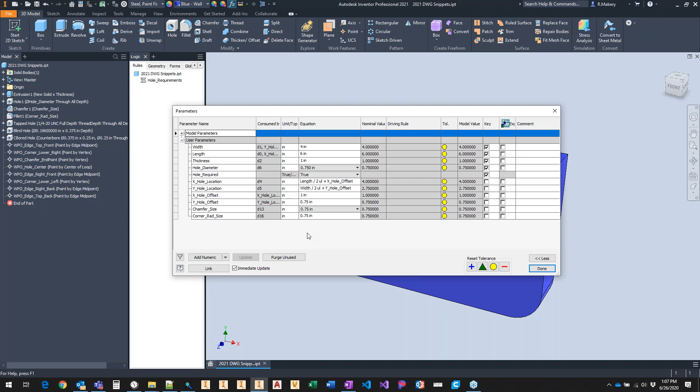Okay, and there's also one single rule in this that is controlling the suppression state of hole one based upon that Boolean parameter called hole required. Okay. And then we also have a simple form that I can control some of these variables. Okay, nothing too exciting going on there.

We also have applied a lot of name geometry to this. Name geometry was released back in 2019, I believe, and it was used a lot prior to 2021 for constraining parts together. It's a way of getting a face, some entity out of my model in order to do something with it.

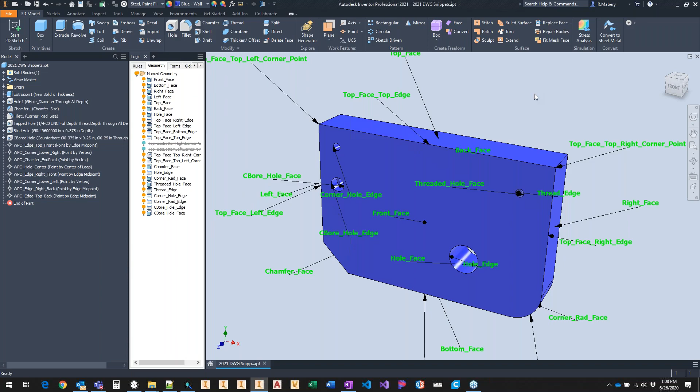If I go to my geometry tab here on my iLogic browser, I'll see that I've got a whole lot of things named, and I'm going to temporarily turn the visibility of those on. Don't get scared by looking at this. I've named everything in here, okay? As I hover over these, we can see the top face. I've got corner points. I've got hole faces. I've got front faces. Anything that I want to be able to, in this case, annotate, has name geometry applied to it.

Now, as we get into actually doing the capture current state, we'll see that I don't need to have named this. But again, I like standardized naming schemes, and this allows me to name it what I want to name it. Okay, so I'm going to turn that off.

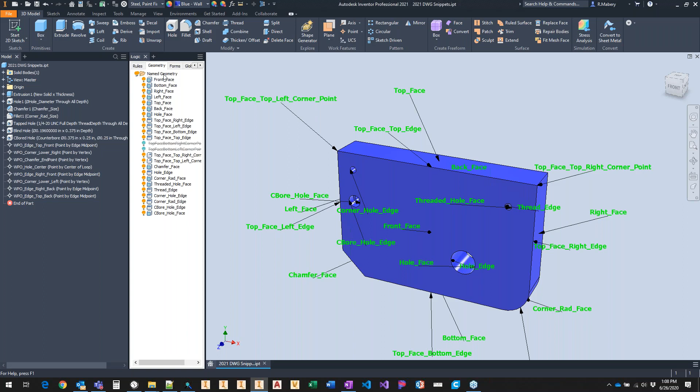And if you're not familiar with name geometry, it's simply a matter of picking an entity on my part, right-click it, and then I can assign a name. This particular face already has one, so my options there are to show that, edit it, or delete that.

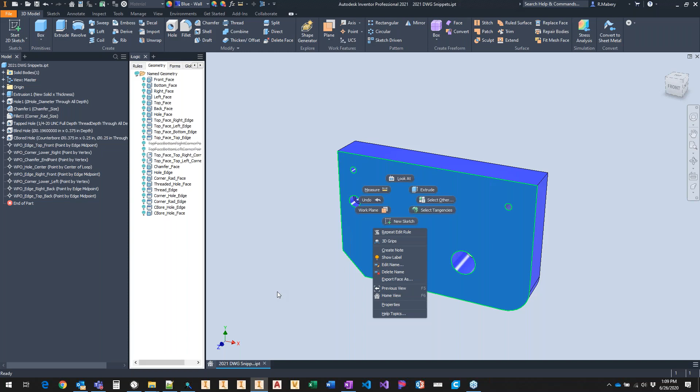Okay, so now we've taken a quick look at the model. I'm going to make a quick drawing here of that part. Okay, just a very simple drawing with two views. I do want to rename my views. Again, anything I'm trying to manipulate with iLogic or any method, I want to rename it. I want to know that it's the right view. I don't want to have to guess that it's view 2 or view 3 or view 4. This helps me understand, again, in my code, what I'm doing.

So I'm going to add a quick rule here. I'm not even going to bother naming this because I'm only doing this temporarily. And I'm going to place in the new add linear dimension snippet. And that is in my new drawing category here. So I'm going to come down to linear dimension. I'll double click that guy. It gets entered into my rules editor. I've upped the font size here rather large just so that we can see everything.

Okay, and let's talk a little bit about what this snippet is doing. It's declaring a bunch of objects and then assigning those objects based upon things in my model, right? I'm declaring sheet 1 in this first line as the sheet that's named Sheet:1, right? That's the default name for a sheet. Same thing with my view here. That is getting the item by name, named view 1 in this case, that's part of this drawing views collection that's on sheet 1. Okay. I need to know what view I'm working with when I'm going to annotate things or when I'm going to get intent from things.

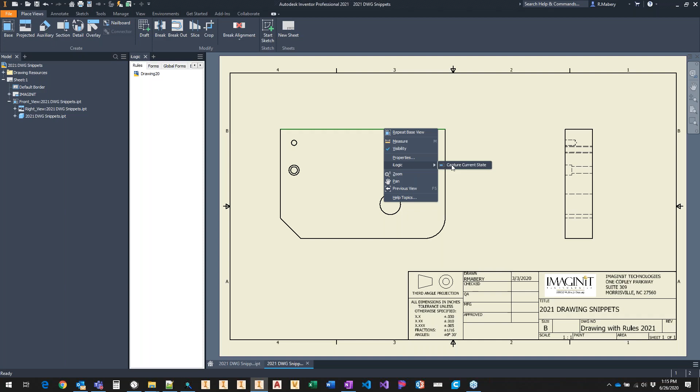Back out in my drawing, one of the other new things in 2021 is the capture current state. I can select or highlight over any curve in a drawing view, right click, and then I have this iLogic flyout, and then a capture current state flyout there. Now, if I have modified this part already, I simply get the code clipboard dialog box that pops up.

If this is a brand new part that I haven't modified from this drawing, I'm going to get a dialog box that says, in order for me to assign a name to this edge, I have to be able to modify that part. So take a look at what it's giving me here. It's giving me, in essence, those same top 3 lines that we saw previously. It's declaring sheet 1. It's declaring the front view, right? We're not getting view 1 because I've renamed my view already. So it knows that it's looking for front underbar view.

And then that geometry already has a name assigned to it, or an attribute assigned to it, a tag about it. It's called top face. So again, it's declaring top face as the front view and the intent of that, or that curve that's being generated there. Okay. Everything that shows up here in the code clipboard, as it says toward the top here, gets copied to my clipboard for the rules editor. Unfortunately, it doesn't get copied to a clipboard that I can use elsewhere as well. I can only paste into the rules editor.

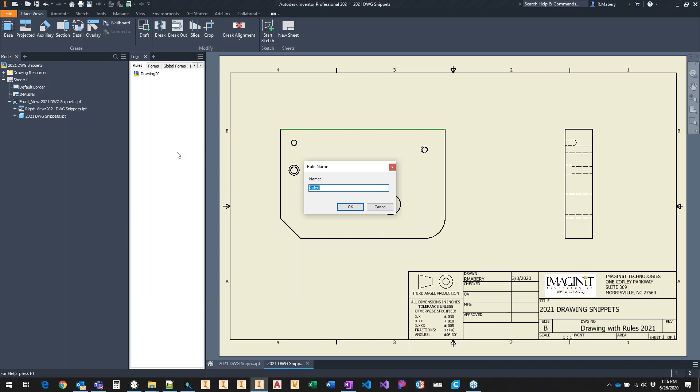So I'm going to just go ahead and hit OK here. And then I'm going to right click and create a rule called overall dims. And then I'm going to paste that bit of code that it generated for me. Okay. Now I'm going to again put in my linear dimension snippet. Go to my drawing category, double click linear dimension, and we get a lot of duplication up here at the top, right? Those top 3 lines I don't really need because I got that from my capture current state. So I don't need these guys at all. I'm gonna go ahead and delete those.

So I still need that gen dims. I still need the access to the general dimensions from sheet 1. And then my lindim 1 there, I'm going to rename to overall length. That name is used when we start managing entities, and I'll discuss that when we talk about some best practices. The next entity is the origin point. Again, that's the Point2D or the X comma Y values of where this dimension should land.

As we look at the way the default snippet uses it, it's got an X and a Y coordinate here, but they're related to my view 1 or whatever view I happen to be working with, and they're in percentages. So this is the X value there. The X value of my dimension text origin is going to be 50% of my view width. And the Y value in this case is going to be 10% of my view height below the view.

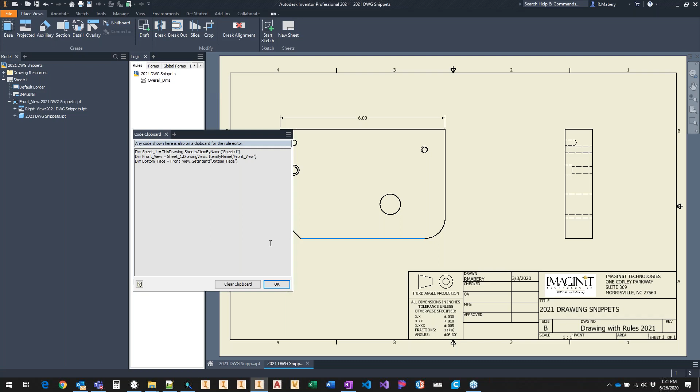What if I didn't want to dimension between 2 faces? Okay, that's where that second optional intent can come in. So let's get some more data out of our drawing view. I'm going to right click here. Again, go to my iLogic flyout, and I want to do the capture current state again, right? It gives me that same information about those sheets, the front view, and then also gives me the bottom face in this case. Okay, I'm gonna go ahead and hit OK.

I'll go back in and edit my rule. I want my declarations where I'm getting that information about the object up here at the top. So I'm going to place my cursor up there and paste, and notice the only thing I'm getting there is that bottom face. I'm not getting the repeats of the sheet 1 in the front view. Okay, so I need to create another dimension here. I'm simply going to copy and paste that LinDim 1. Right, copy and paste is your friend. I need to change this guy to 2, and then we'll change to overall width.

And I'm going to use again the front view, but my sheet point needs to be modified, right? I basically need to flip these because I want to go to the right, and then I want the Y value to be in the middle of that. If I leave it as it is, it's just going to try to dimension that top face. We need that secondary intent, right? Remember that optional intent 2 as a secondary geometry intent. So I'm going to copy my bottom face to my clipboard, and I'm simply going to come here and put in a comma and paste that bottom face. So I see there in bold now, I'm including that optional intent 2 as my geometry intent.

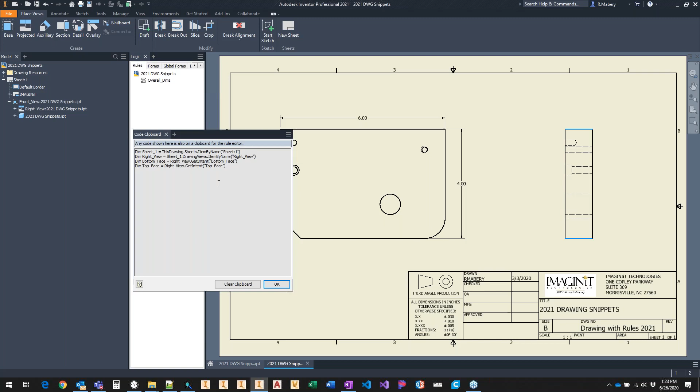Also, nothing wrong with it if you know what those values are, right? If you've gone through already and added that name geometry, I could come in here and replicate lines like this all day long, just modifying what the object name is going to be, and then modifying that string argument, what intent or what geometry you're trying to find outside in your model.

Okay. So that's the basis of a linear dimension. I need to declare some stuff: the sheet, the view, whatever entities you're trying to dimension. In this case, I'm dimensioning both the top face and the bottom face. I get access to my general dimensions collection here.

And then I'm using the AddLinear for the various dimensions, right? What's my dimension string? What's the name? What's the text? And then what's the intent that you're trying to dimension? So let's talk a little bit about some best practices before we move on and look at some of the other stuff. One has to do with this text origin.

This is an easy way of placing where things show. It's not giving me the most control, right? 10% of that view, what does that mean, right? I should be spacing my dimensions a 1/2 inch off the object, and then secondary dimensions should be placed 3/8 off of that first dimension, right? If I'm doing that where it's percentage of views like this, I don't want to have to go do the math to try to figure out what that is.

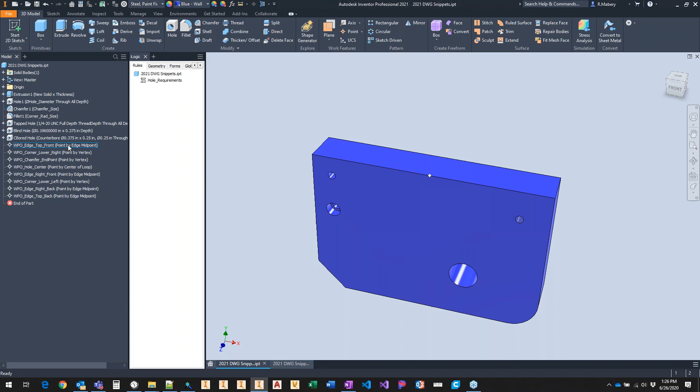I'm going to use that and get its sheet point and then space my dimensions away from that. I know where that point is in space, or I can figure out where that point is in space and then offset it to values that I want it to be. Okay, so I'm going to go back to my drawing here, go back to my overall dimensions, and I'm going to include a secondary line of code here. Oop, I copied too much. So I'm going to copy just that bottom line, paste it in there, and then I'm going to call him WPO edge top front.

And then I'm going to get that entity. I hope that's what I called it. Right, I'm getting the intent of that point. Let me go ahead and run that to make sure that's what I actually called it. And it is. I would have got an error there if it couldn't have found this entity inside of that drawing view. Okay, then I'm going to do some calculations here for where that point needs to be.

So I'm going to dim top length position as this drawing dot geometry dot Point2D. Again, that Point2D you can think of as an XY point somewhere on my drawing in this case. I'm defining that at this point at 0, 0. I don't really care where it's going. And then I can set it to the value of what that work point is according to my sheet.

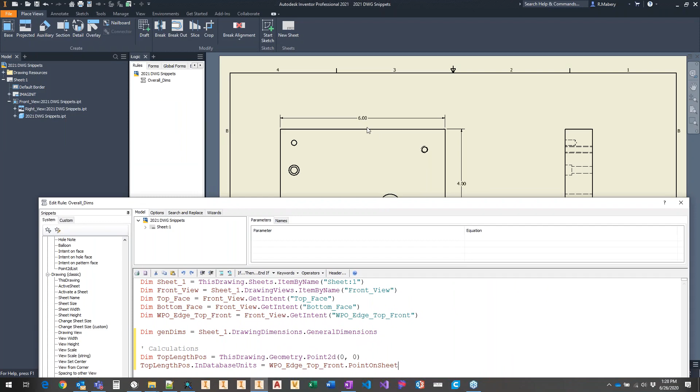So again, I'm going to copy and paste just to make it easier there. And I'm going to do the point on sheet property of that point. Let me move this out of the way real quick. That's going to translate that point to an XY value on my sheet. And then that's going to be stored in the database units for the position top length POS. And then I don't need to modify the X because our point was along the midpoint there. I really only need to modify the Y.

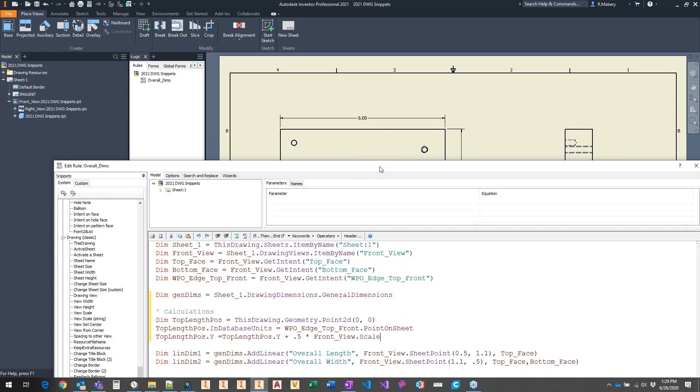So again, I'm going to say the dot Y of my top length position equals the Y plus whatever value I want that to move up. I talked earlier about that being a ½ inch off that. And then I'm going to modify that by the front view scale. It might look complicated, but again, we're very simply getting that point in space relative to my drawing, and then I'm going to move 0.5 inches up. I don't have to worry again about modifying the X value.

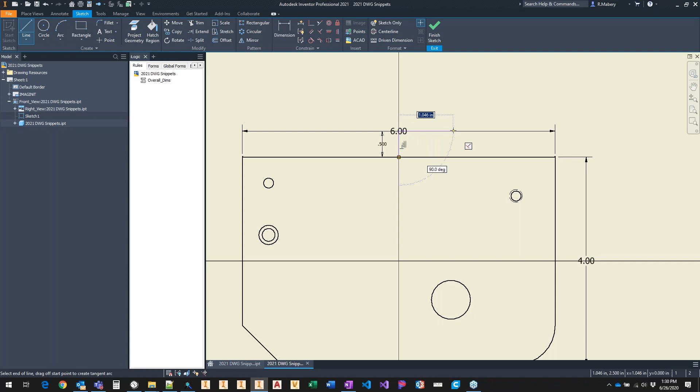So now I don't need this long string here. I can replace that with my top length position. Remember our AddLinear there, it's looking for a Point2D in essence. And that's what I'm supplying it here with this top length position entity. You saw that thing shifted up ever so slightly. If I go make a sketch on this drawing and create a line from that midpoint up a ½ inch, there we are, right on that extension line. I know exactly where that dimension is going to end up, right where I want it to be.

Again, that comes in very handy when I'm trying to add multiple dimensions, right? When we get into dimensioning that hole, I'm going to want to be able to move things around. I can do the same thing here for that right dimension, and to make things a little easier so we're not watching Randy type the entire time, I do have this text already written out. So all I'm doing here is I'm getting another point, right? That work point edge right front.

And then I'm doing the top width position the same way we did the other one. Okay. I'm creating a Point2d. I'm getting that right front point on the sheet. And then I'm modifying the X in this case, right? I want it to move over to the right a ½ inch.

Then I would modify all of that there. Okay. Replacing that long front view with just my top width position. Hit save and run, we see that dimension move ever so slightly there.

Okay. Something else I should be doing here is using my manage entities. Works very similar to the manage objects that was introduced, I think, again in 2019, when I start adding components with the iLogic manage components. It's going to handle deletion of things that aren't required.

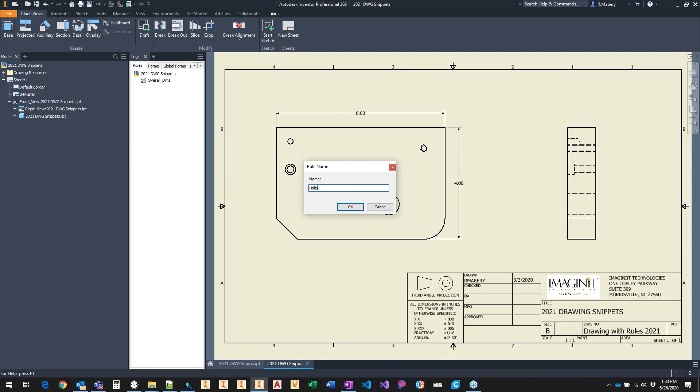And again, I'm going to cheat a little bit so we don't watch Randy type. And I'm going to paste some code in here. Okay. Size this a little bit more so we can talk about what's going on. The stuff here at the top should be familiar at this point, right? We're declaring that sheet. We're getting the general dimension collection, and then I'm declaring that front view.

Now, if you're going to put all of these into one single rule, right, I wouldn't be doing this every time, but for this situation, I thought it'd be cleaner if we separated them so we know what each individual rule is doing. Then I also want to get some model information. So this is something that's been in iLogic for a while now, down in my advanced drawing API category.

I'm going to get the model document name. I'm going to use that to get my parameter. Okay, I want to drive whether or not I'm getting a certain dimension based upon parameters inside of my model. So in this case, it's declaring that model name, and it's getting the full file name out of the model document. Think of when you're working in a drawing and you place a view, it's that first model that goes inside of that drawing.

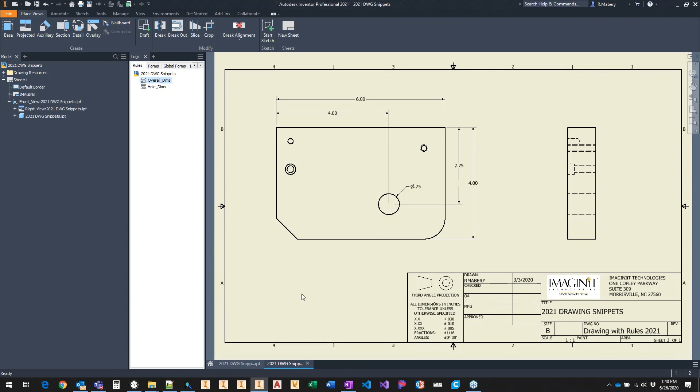Okay, so now I've moved my dimensions out. More than likely, when we're talking about annotating like this, I'd want to add these things as event triggers. Anytime a view changes or when I'm opening that document, I want to throw these dimension changes onto that drawing view change and also on the after open document.

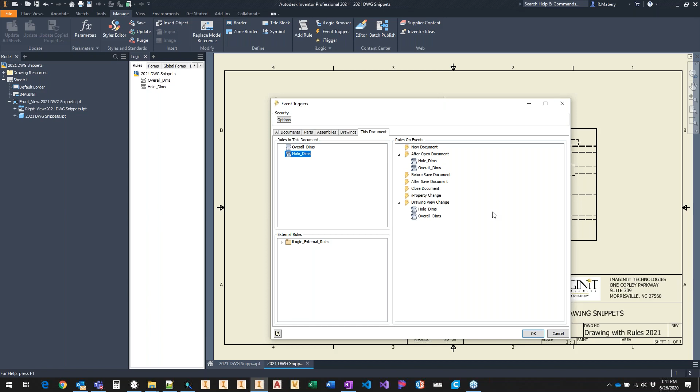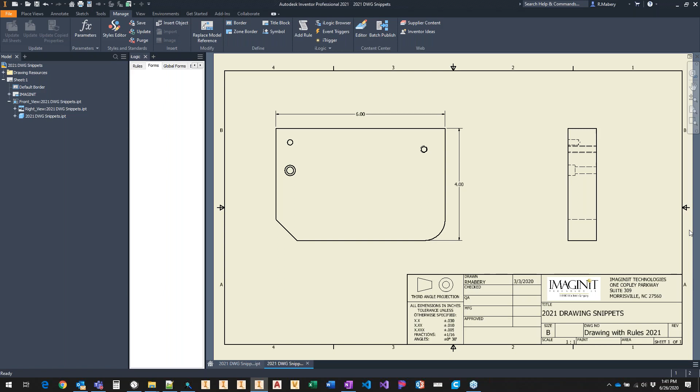We can test that by popping over to my part, opening up key parameters, and turning off that hole required—my hole suppressed—then going back to the drawing. Those other annotations disappeared, and my 6-inch and my 4-inch moved into being a half inch off of that view. Let me go back and turn that guy on, and then my dimensions move as they need to be there.

Okay, so let's talk about center marks real quick. I'm going to add another rule here called center marks, and again I'm going to copy some code I've already generated. The top three lines there, again, nothing new—the same things we've seen before.

I'm getting some model parameters, just like we saw before. I need to know whether or not that hole is required. If the hole is required, then I'm going to get that hole edge, declaring a hole intent here off my front view—get intent of the object called hole edge, or the object that has the attribute called hole edge there. I've also got some additional information: I'm getting the center point of that hole edge. The K center point intent is telling me where that hole edge is, and that's where I'm going to place my center mark.

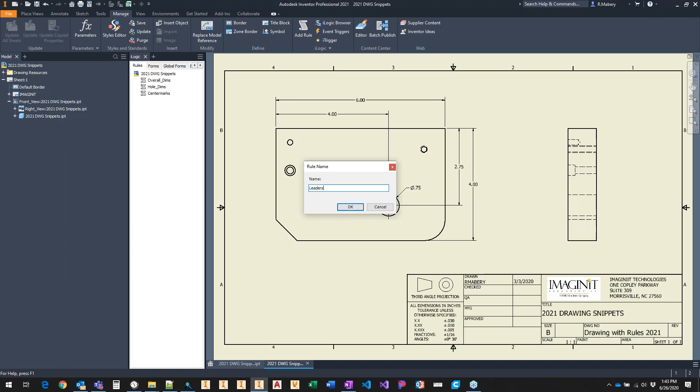One more thing to talk about is adding some leaders. So I'm going to add a rule here called leaders, and again, to save a little bit of time, I'm going to copy and paste some code. It's coming in there a little bit hairy looking, but...

At the top here, again, I'm declaring my objects, my sheet. I'm going to put this on the right view. Then I'm getting a point that I'm going to apply my leader arrow point to. I've named this object leader arrow point, so I understand that that's what's going to get attached to. Instead of general dimensions, leader notes are part of the drawing notes collection, so I'm declaring here leader notes as the drawing notes leader notes.

And again, that's all part of the leader snippet. If I go place the leader note snippet in there, we get that same information. I'm going to delete that for the time being and just show you that dim leader note 1. So again, I'm doing the add method on the leader notes, and the arguments are the name as a string, and then the leader points as a list—it could be a list. And then what am I attaching that to, as the geometry intent? That's what I got the WPO edge for—that's where I start my leader, and that's where the arrowhead's going to end up being.

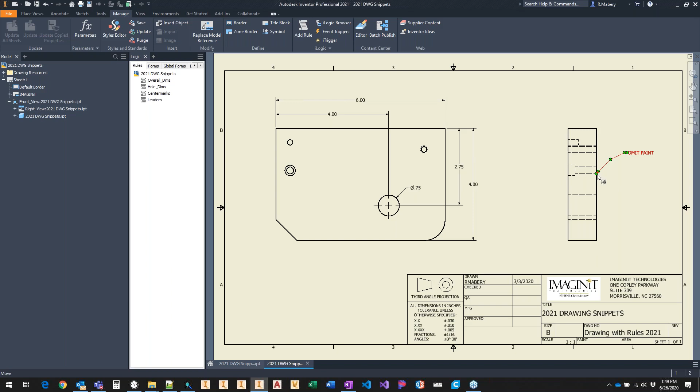If I hit save and run now, there it placed my omit paint leader over my right view. It got connected to that point in space, and I've got a vertex there - that was leader position 2, and leader position 3 is the beginning of my landing.

There are some limitations exposed through what I can do with the iLogic snippets. There's some things I still can't do that you can do with the full API yet - I say yet because I have no doubt those things are going to come out at some point. For doing basic dimensioning like we're showing here, it still works great, and I have no doubt we'll get additional stuff in the future.

You can still get to some of those other limitations - other properties, other methods and things of dimensions - if you're used to doing things with the API. I can still get to things like changing what that text is. I just need to modify that value to get its native entity object. In this case, if I wanted to modify that overall length, that's the 6 dimension right there. If I want to change its text, I could always go to lindim1 dot...

And then I get my contextual help there - native entity - these are all methods and properties I could be modifying based off that linear dimension. I'm going to go back and modify its text property, and then in there I want to modify the formatted text. I'll do a string concat: dimension value, and then just the word 'length'. So this is going to place that dimension value that's currently in there, and I'm just putting the word length on the back end of that - I should put a space in there.

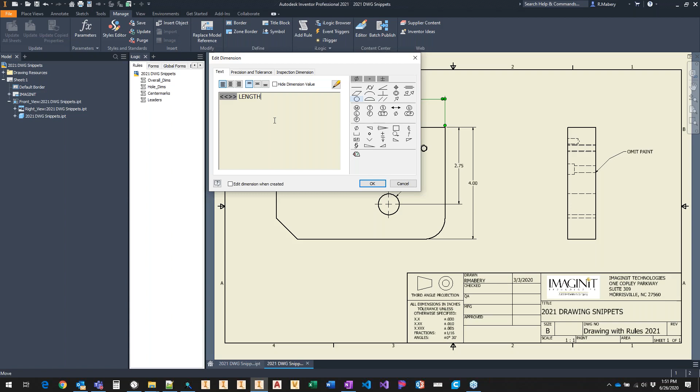So again, if you want to mix in some API and stuff, something you can't get with just the snippets - modifying the text, changing tolerances of things like that - I can still use the iLogic snippets to create those dimensions. I just have to modify that text or those values in a slightly different way.

As I was putting together this presentation, I realized there's a whole lot of information in there, and I preferred to get a little bit deeper so you can understand what those arguments are that linear dimension is looking for. That same information can be extrapolated to the chamfer dimensions, the angular dimensions, the hole notes, etc.